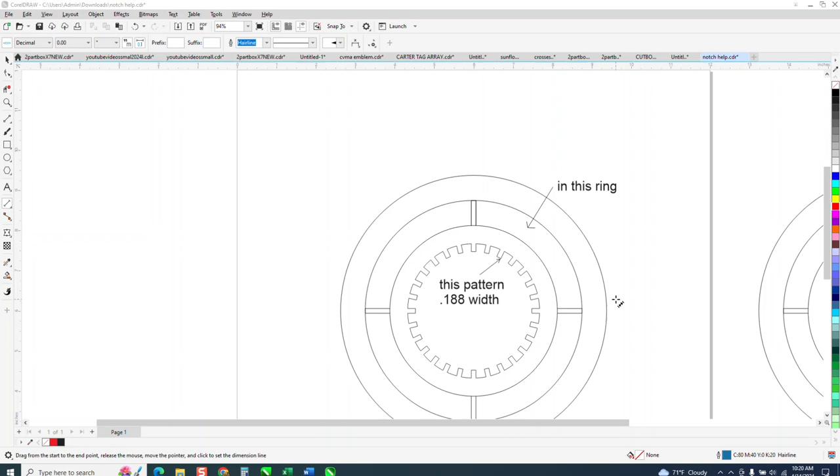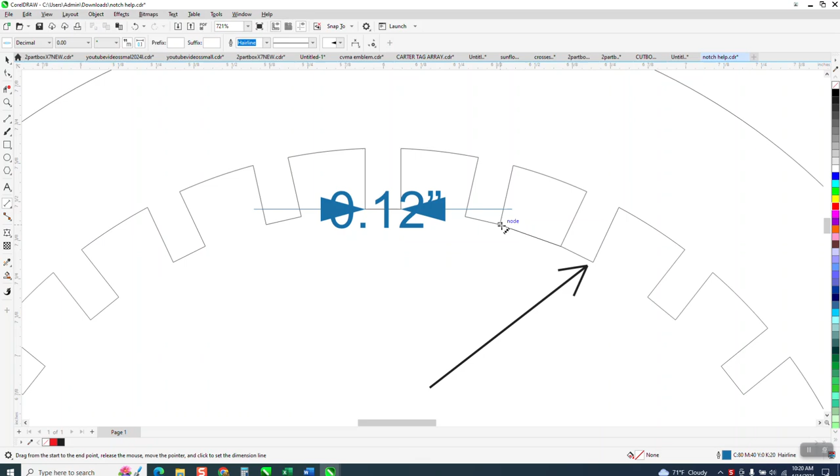Somebody sent me this file and I'm a little bit confused. I'm thinking he wants to put notches into this ring with the same pattern, but I don't see the .188. If I take the parallel dimension tool and measure this, I get 0.12. If I measure this, I get 0.21. So I don't know where the 0.188 is. I'm just going to go with my gut feelings on this. I'm going to take these rings and move them out of the way so they don't interfere, and I don't really know what this is.

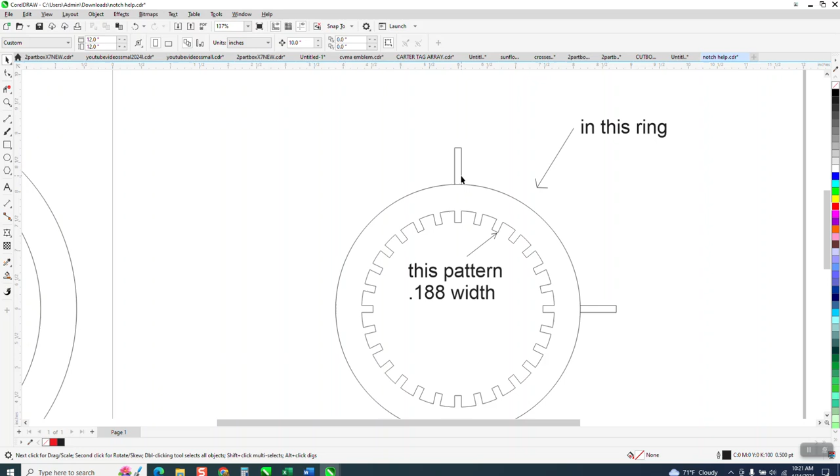So we're just going to get these out of the way. I still don't understand the .188, so I'm going to get rid of this. What we need to do, if we want these notches to be equally proportioned up and down from the other one, is take this ellipse—since it's an ellipse, we need to go to Object and convert it to a curve.

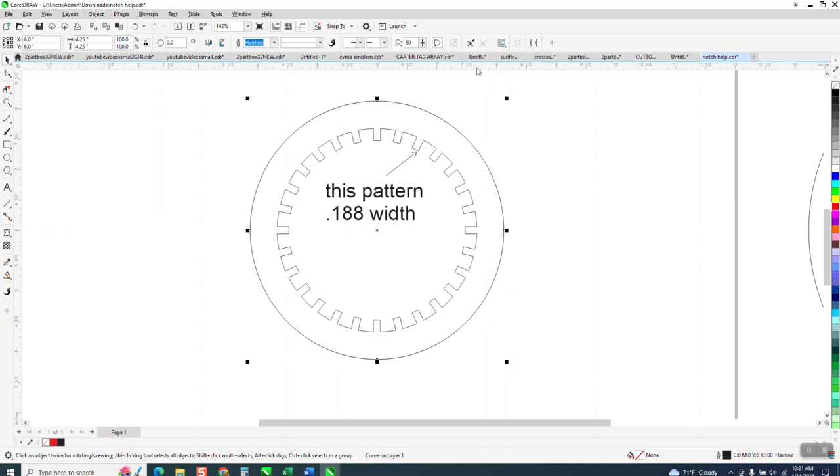Then we need to go to Windows, Dockers, Properties, and then over here to this squiggly line. So the length of this curve is 13.35365. I'm going to write that down—13 point... see, that's why I have to write it down, I've already forgotten what it is. 1335, 365.

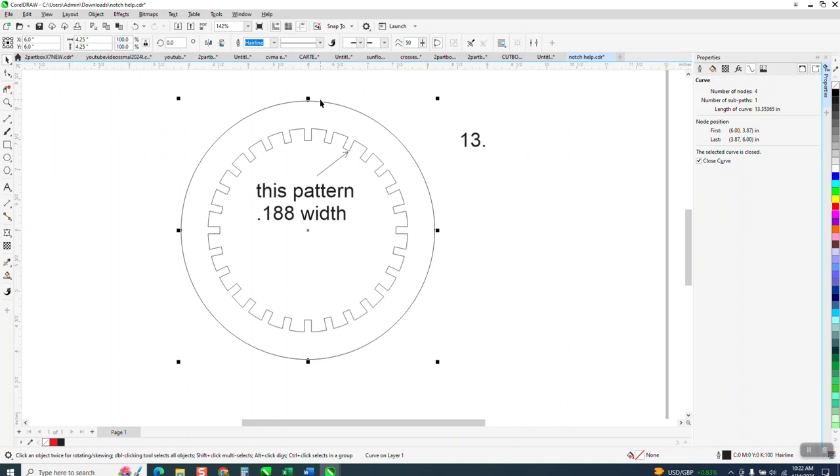If you get your text tool, you can just keep writing 13.35365—so there's our measurement of that ellipse. And if he wants this to be the same, these squares are 1 point.

So the best way to do it would probably be to take a 2-point line and go from there to there. I'm going to change his settings, hit F12 on the keyboard, and change his dimension drawing tool to a hairline. I'm going to make it red, which really doesn't matter—make it RGB red. Well, it still says CMYK. There we go. So now when I draw that line, I get the 2-point line and go from there to there.

I'm going to fill this in with the Smart Fill tool—doesn't matter what color. I'm going to hold it down and hold down the control button. I don't know if he wants it on the inside or the outside, so let's go to the outside.

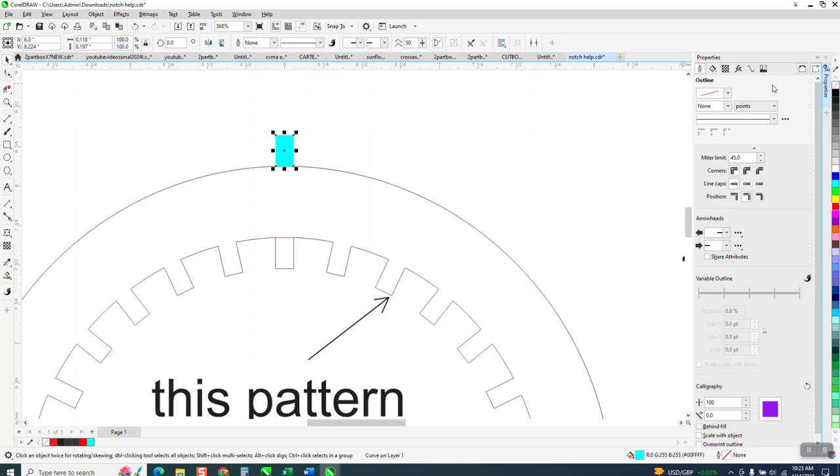Now I'm going to left click, right click, and bring out a calculator. 360 divided by 13.35365, and we get the angle is 26.95. We're going to go ahead and copy the whole thing to make it accurate—make a copy of that.

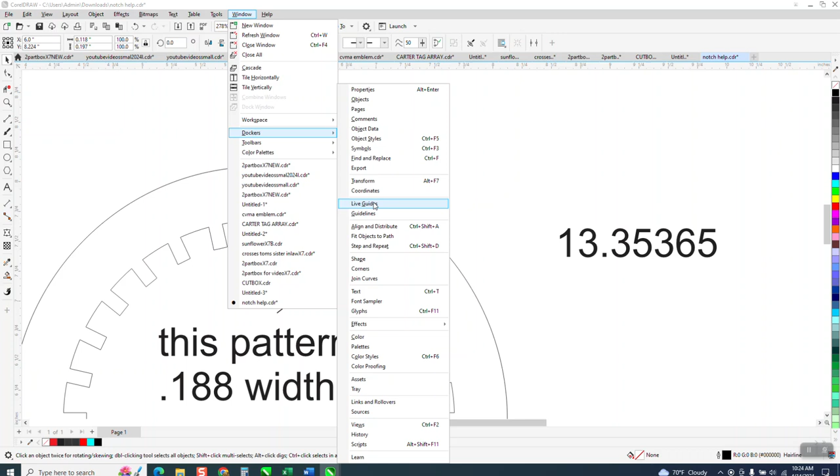Now let's open up a Docker, transform or transformation, depending on which one. We're going to go to here, and we're going to use that angle—right click and paste that angle in there.

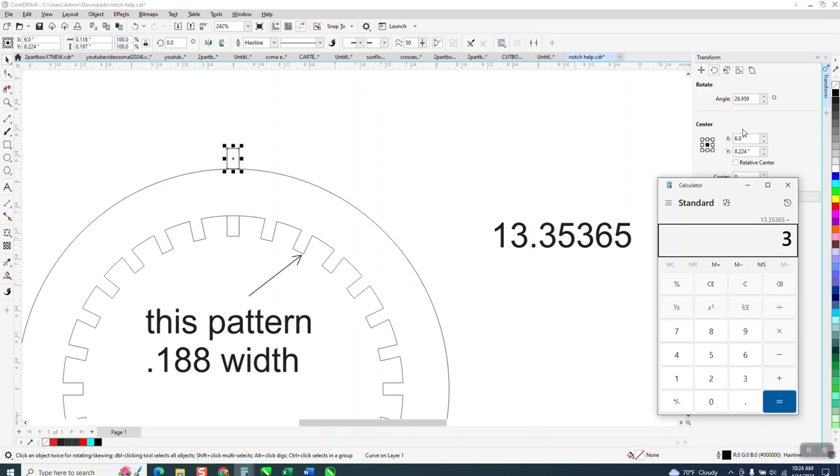Now, I don't really know how many are going to go in there. So let's get the calculator back out: 360, well now we need 13.35365 divided by that number right there, which is 26.959. So we need 36 of them basically.

So we've got the angle and we're going to go 36, but whenever it says copy, you need to take one off for the copy, and then let's hit apply. Whoop, I didn't change the rotation to the center of the page. I'm going to hit my alternate C.

Well, I'm using his file, so let's bring in indexing lines and hit P, take this and double click, and move our rotation to the center of the page. It doesn't look like it is, but a lot of times it's there—and it is. So now let's try it.

I do not know why it did that. Let's back up here. That is weird. And it's not really... so maybe that's not even what he's wanting.

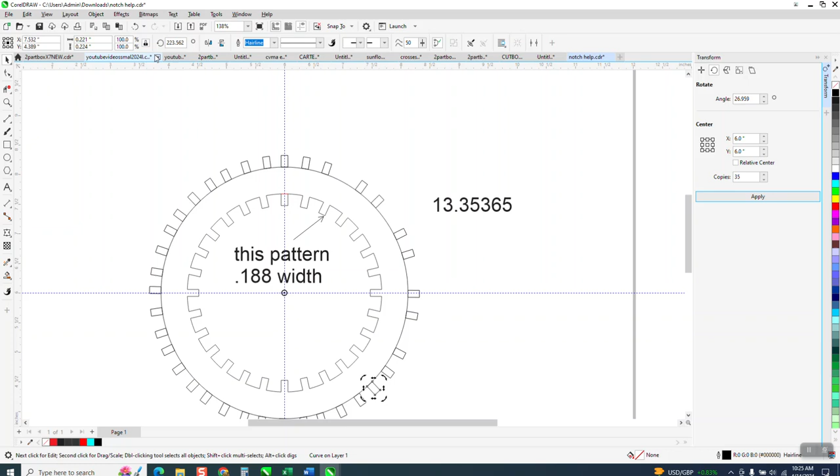I guess we're going to have the same number of—and he actually had a drawing over here. Maybe that's what he wants. He wants the notches to be equal with that.

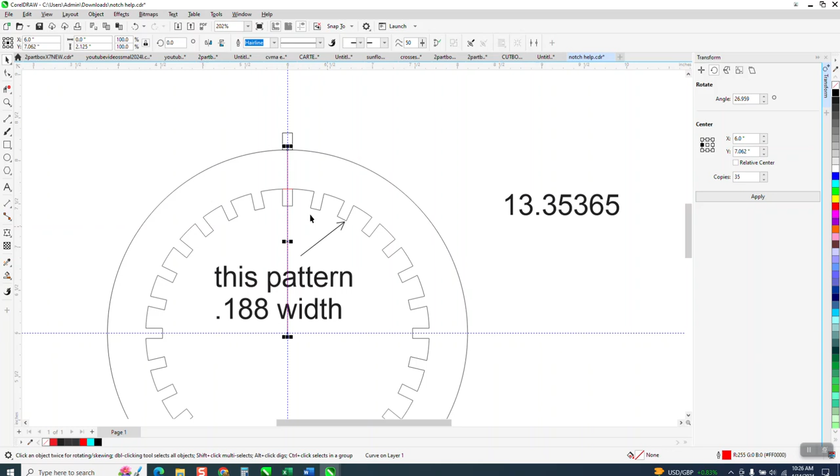So let's take a 2-point line starting in here, hold down the control button and go to that line. You can see it's in the center there. Double click on it, move our rotation to there, click off of it, click back on it. And let's rotate that to the center. Now, we don't know if that's exactly in the center.

You know what we could do? Let's back up here. There are, counting this one, 1, 2, 3, 4, 5, 6, 7, 8, 9, 10, 11, 12, 13, 14, 15, 16, 17, 18, 19, 20, 21, 22, 23, 24, 25, 26, 27, 28. There are 28 of them.

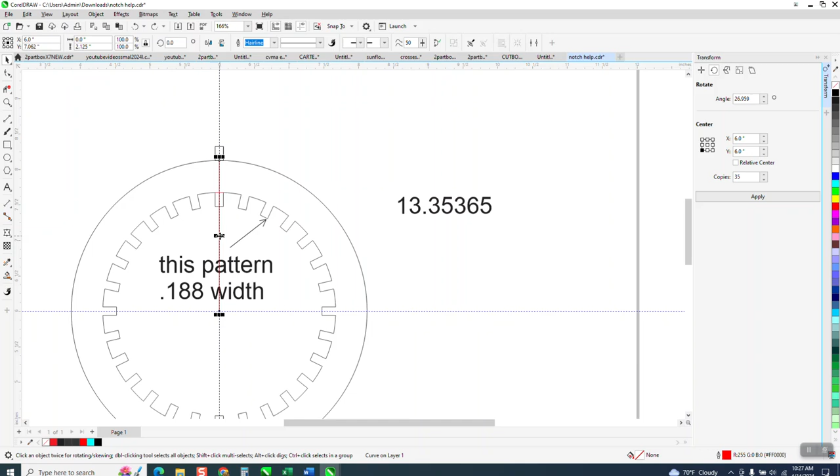So let's make sure it's rotating from there. Let's go get a calculator: 360 divided by 28 is 12.85. So let's copy that number—copy, angle, paste—and we need 28, well actually 27.

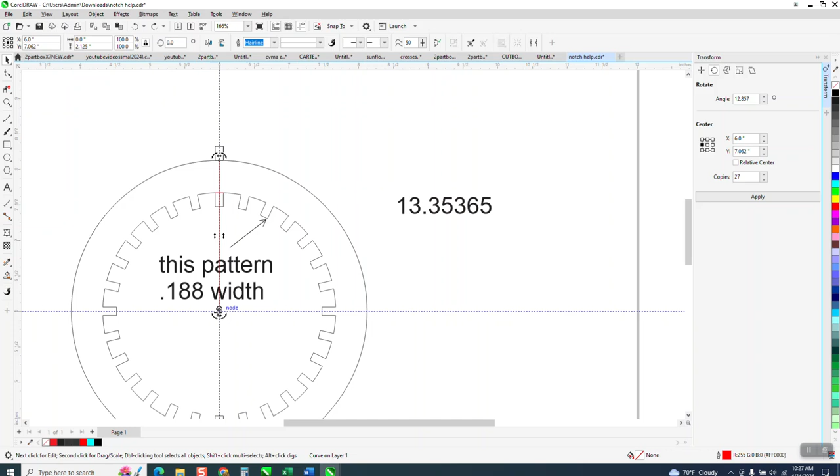I didn't have the rotation of the line. I thought I did to that node. Not quite there, I'm going to have to zoom in. Yeah, it's there. Now let's try it. Now we got the center.

So I'm kind of doing this backwards, but we know that it's that angle. So now we're going to take this, double click on it, the rotation's in the center. We want that same angle.

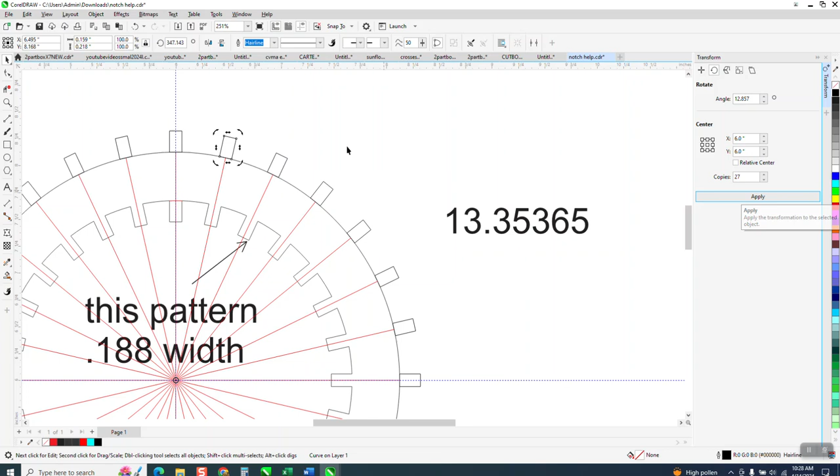So now those are separate of those. Now this is what I like. Let me get rid of this wordage and get rid of this. And if you hold down the Alt key, you can swipe through here and grab all the red lines.

Those red lines must have been connected. Let's get rid of that.

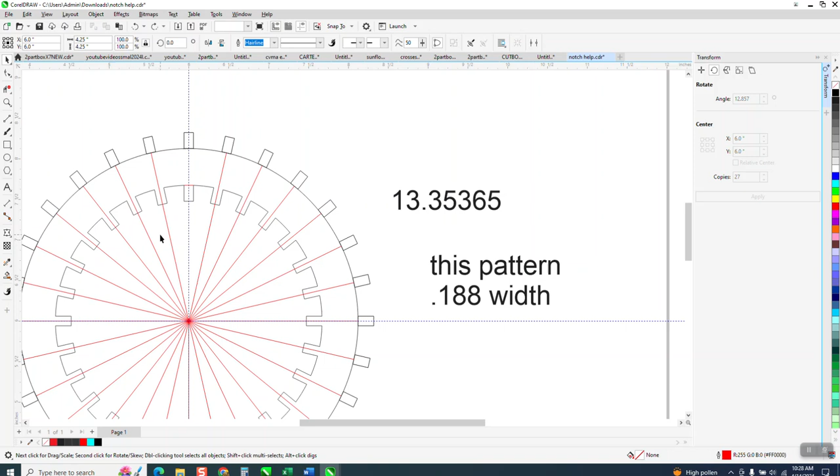For a second, I'm going to move that out of the way. Now I'm going to use my Alt key, and whatever touches the red lines, it'll delete them. Let's delete that. Now let's move this back. I hope this is what he was wanting.

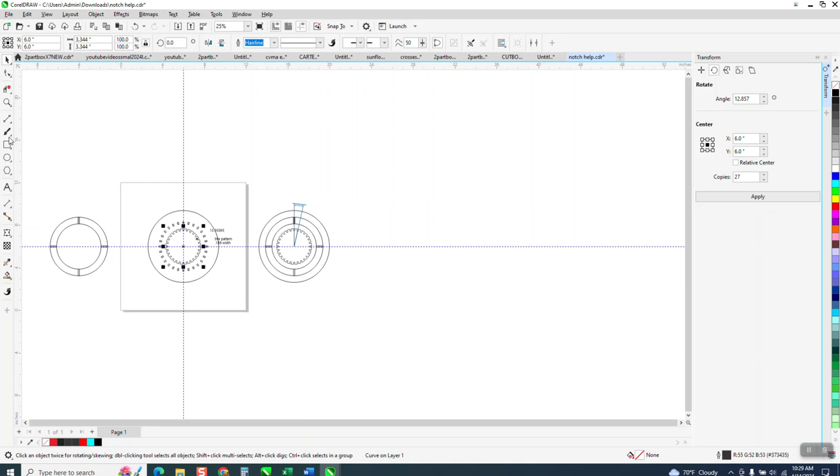So now we have the same gear ratio up top that's in the bottom.

Now to get rid of those parts, let's try this. Let's move this down, let's move our circle over to the left. Let's move this down. Let's go ahead and group this together, and we can move this ring back over.

Let's see if the weld tool does not weld it. There's a couple options we can use. Make sure you select it all and weld it. Yep, you got rid of them, the notches.

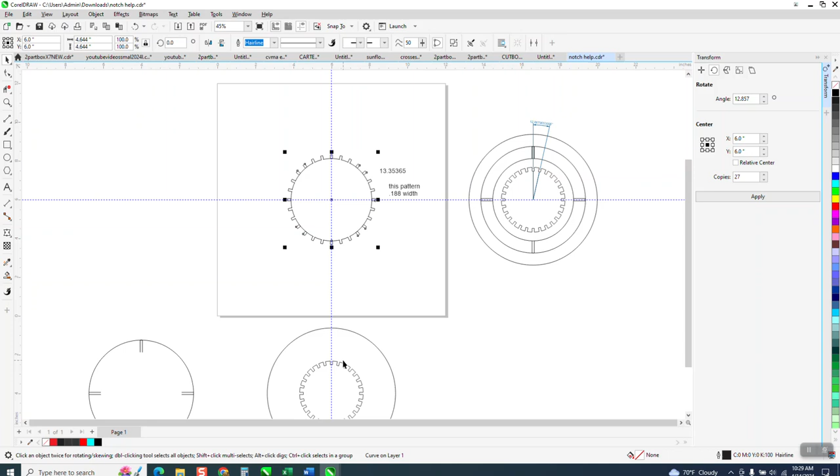Now, I don't know if you want them on the outside or inside, but this way the notches, well, there's a couple that didn't weld. You can always take, you know what, let's try this. Before we do that, let's try another weld option.

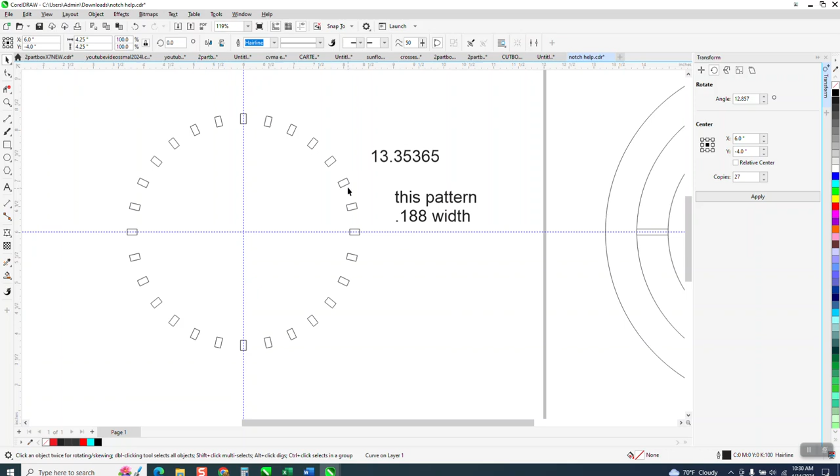Well, we need to group these together. I think I did group them together. Yep, they're grouped together, you've got to have them grouped together. And now let's try either back minus front or front minus back.

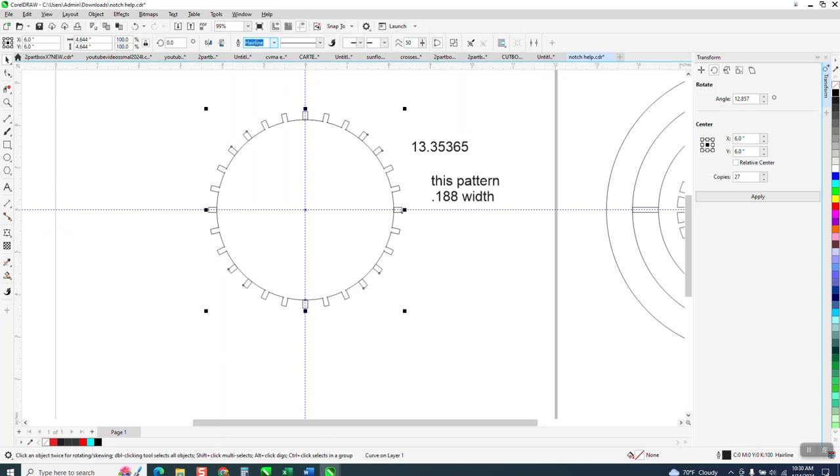Nope, do the opposite. Oh, let's try welding them one more time. Huh, it's not welding them at all. It could be that they're just, yeah, they're going around that turn.

So what we can do is take this circle and make it, with this ratio lock, let's make it 101% bigger. 101%, well that's too big.

I don't know what he's doing. 100.05, just made it a hair bigger. Let's zoom in and see what happened. Yeah, see now our lines are below that circle.

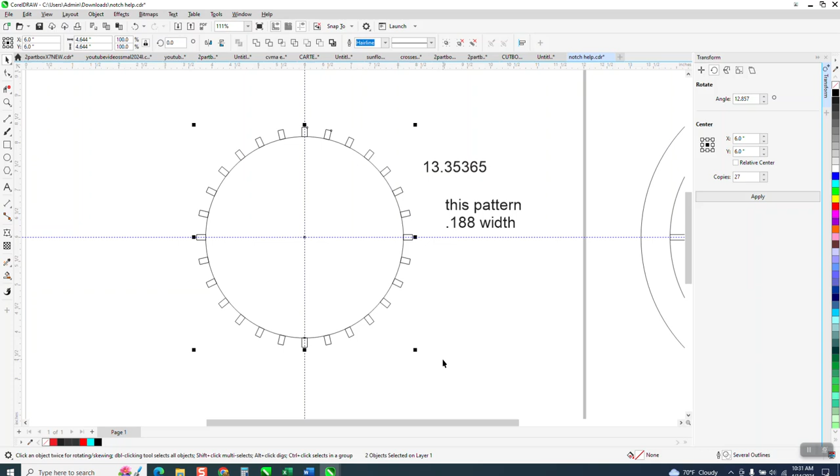And now we can grab both these and weld them, and that way it worked. Now bring this other ring up. So now if this was like a cog of a gear, each one of the cogs is lined in line. So he might have wanted them on the inside, but he can do the exact same thing on the inside.

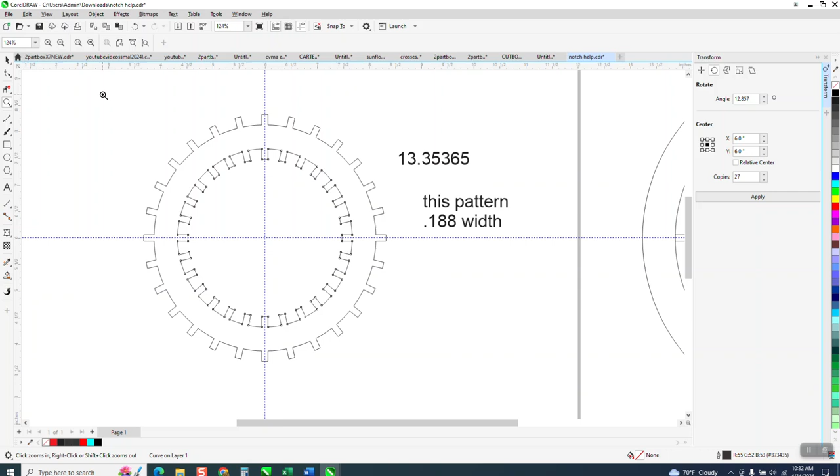That probably makes more sense to have them on the inside. Let's just back up and let's just do that. Gonna have to back up pretty far. So let's put this on the inside now.

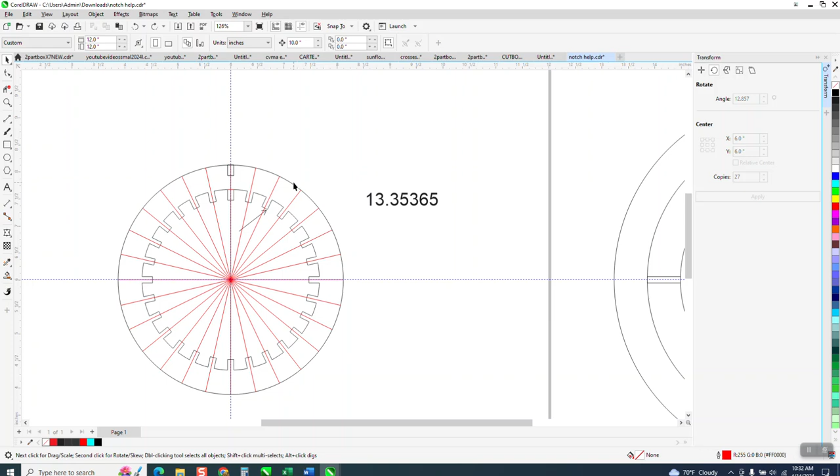So now we can take this, holding down the control button, and let's make it like right there. Now let's go ahead and get rid of this garbage. Holding down the Alt key, deleting it. See, the circle is taken over because when we attach, we're attaching the circle.

So let's just get rid of all this. Now hold down the Alt key, delete that, bring our cog back, bring our next circle back. Actually, I don't want the cog. So we're going to move the cog out of the way for a second. I'm going to move it down, and I'm going to do the exact same thing.

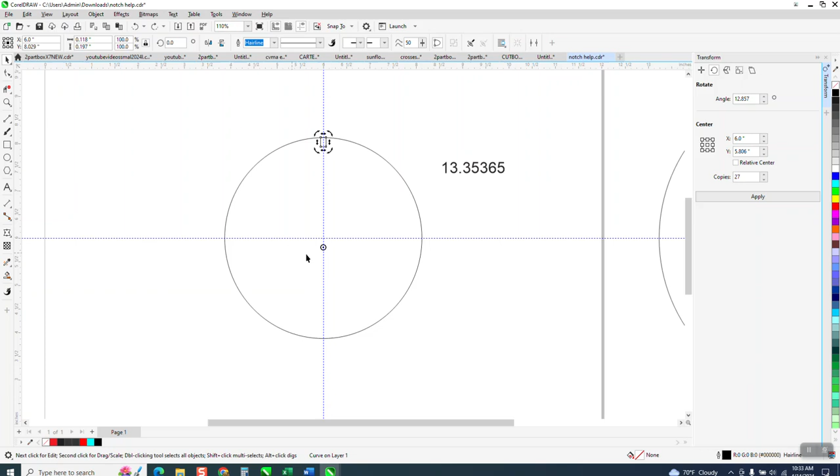Now, somehow I don't have it in the center. You can see my rotation is not in the center. There we go. Now let's take this, and these are individuals.

So let's take, for this to work, you've got to move this out of the way and group this together. Control G, move our circle back, and then weld it.

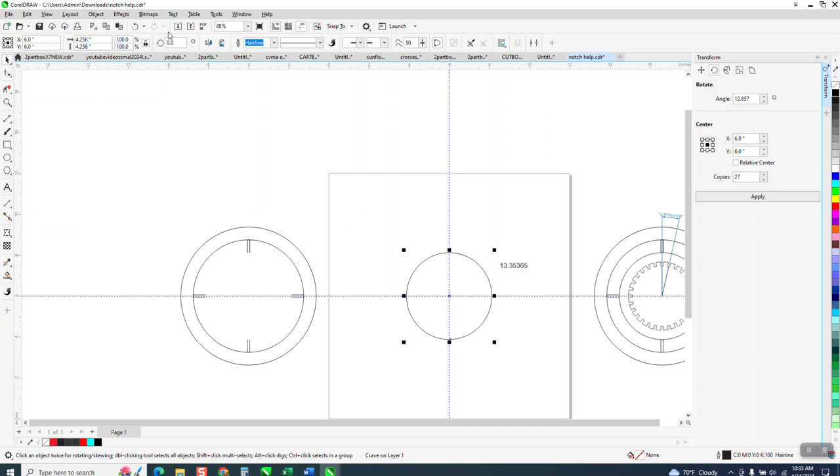That didn't work with a weld. There we go, now we have back minus front. Now put the cog back. Now we got inside, and so each one of these match now.

I don't know, hope you can see that or understand that. I'm hoping, if not, he'll email me back and tell me what I did wrong. And I really don't understand.

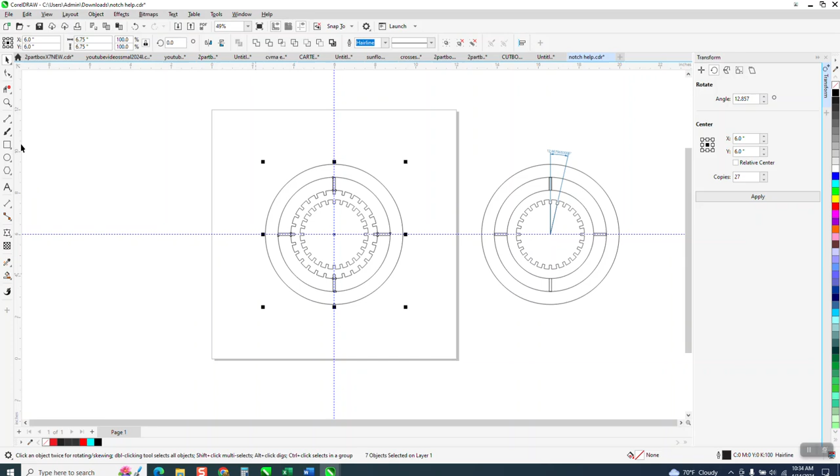Let me move this number out of the way. I do not, and see, this is the whole time I've been nudging, so I can just nudge right back. And if you look, those are within that circle. So I don't know what he was trying to do.

So we're perfect. Anyway, I hope that helped a little bit. If not, he'll let me know. Hope that helped. Thank you for watching.